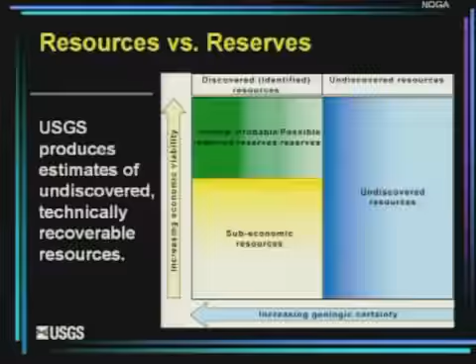As far as resources versus reserves, this is a key point to us, and it's key for us when we talk to people in Congress. The congressional people seem to switch seats very rapidly. All the staff has rapid turnover, so we're constantly going over these terms. Just to let you know that the USGS responsibility is for assessing undiscovered resources, which is this blue box on this thing. We don't do reserves. Reserves are the purview of the Department of Energy. We don't do economics either. We have all we can do with geology. The economics are left for people like the people here at the Baker Institute.

The goal of the national assessment in the U.S.: we look at priority basins. There are approximately 70 geologic provinces in the U.S. About 42 produce oil and gas. We've prioritized about 32 of those, which contain about 96% of the known resources. As geologists, we chase after the petroleum systems, which are the fluids in these basins, and the assessment units are plays, which are the rocks. So we have a bunch of guys who just chase after the fluids and rocks.

And in the end of that, we have to somehow on paper come up with numbers that are somehow backed up by the geology. We assess both conventional and continuous resources. The word continuous is something we put in there to replace the word unconventional. And finally, economics are not included, and that's an important point that's lost as we deal with Congress. They think we do economically recoverable resources, and we don't do that.

One of the interesting things that happened in the year 2000 was for the first time, after 30 years of doing these assessments, there was a law put in place called EPCA, where it actually named us to do these assessments, basically aimed at assessing oil and gas on the federal lands. And again, you can see they use the word reserve in here rather than resources, which is a real problem. But for the first time, there was a law in place that said we had to do this on a regular basis and provide these estimates to the congressional committees. And that's what we're working under presently.

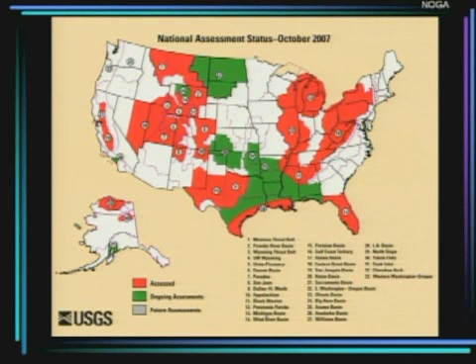For the status where we are now, the red basins, this is not a political statement. This is simply the basins we've assessed so far. The green ones are the basins we will assess in the next few years. That will encompass all the major onshore and state water resources in the United States. Again, we don't have the jurisdiction to do the offshore. These are the basins we'll do in the next few years that will finish this latest round of basins for what we call the 2000 plus assessment.

The methodology, it's important. You simply have to know how we arrive at these numbers. We have conventional gas resources and what we call continuous gas resources. Those are the ones like tight gas sands, basin-centered gas, gas shales, coal bed gas, gas in chalks. So we have these 2 main categories of resources and hence 2 main assessment methodologies to cope with that. And again, we use the word continuous because it's geologic. Unconventional, we started to have problems with the congressional committees in that you use conventional wells to get at this stuff. Why do you call it unconventional? So we went to a more geologic definition.

I'm not going to say much about hydrates. We're about to do the first assessment of hydrates on the North Slope of Alaska. That will be done in about the next 6 months. And again, my job as project chief is to take a bunch of geologists and try and wrestle how much uncertainty they're dealing with in these assessments. It's a big task, especially with geologists who can never agree on anything.

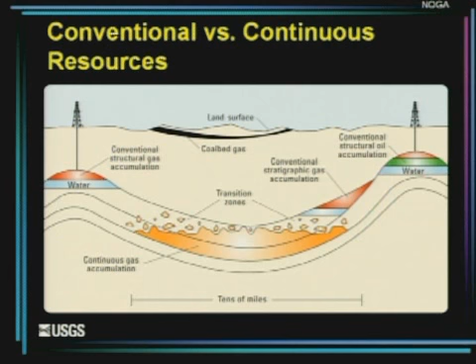But there's this big class of resources that we call continuous that are very diffuse across basins, regionally, and geologically we go to that continuous term. And again, that's basin-centered gas, tight gas, gas shales, coal bed methane. So we use a very different methodology to assess those. So again, very different geology, very different methodology. And you have to know that as you go into the assessment process and know what those numbers truly mean.

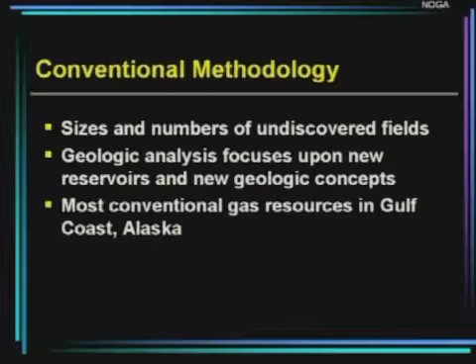For conventional oil and gas fields, we come at this with a size and number methodology. We know the field sizes of existing fields. We use that as guides to what possibly could be found in the future. Most conventional gas resources in the U.S., as we assess it, are mainly focused in the Gulf Coast and Alaska.

For the continuous accumulations, these are coal bed methane, tight gas, gas shales, even hydrates. We use a very geologic definition of the assessment units, and then we go at this with an engineering approach. We look at well production performance, decline curves of wells, drainage areas of wells, and try and come up with a very data-based and data-grounded assessment methodology. So again, one that will produce numbers that are certainly technically recoverable numbers. These are not in place numbers. And again, every quantity here is uncertain. And my job is to define that uncertainty and get the spread of the results as large as I possibly can to cover every base.

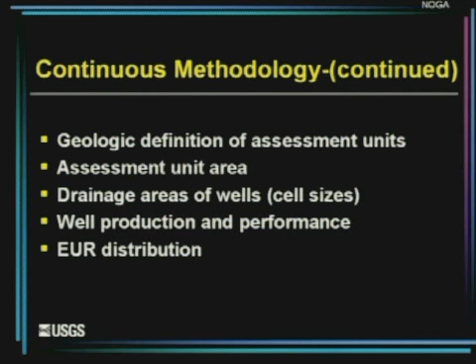Again, what we do is we come at this play area or assessment unit area. They have to define that. That's a problem. We look at drainage areas of wells. We need wells that aren't interfering with each other when they produce. It's a very difficult quantity to come up with. Well production and performance, we look at the estimated ultimate recoveries of wells, come up with distributions of that. So we have a distribution of estimated recovery, a distribution of drainage areas, and error on the definition of the play or assessment unit. Put all that together in an analytical solution to come up with volumes of resources.

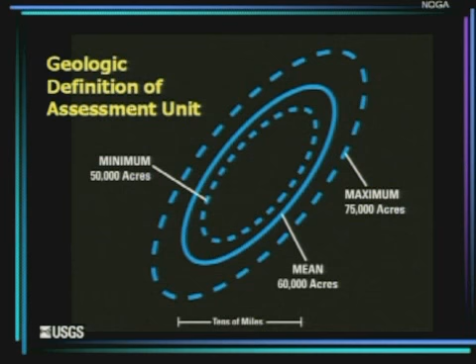I'll very quickly go through this. This looks like Saturn, but it's actually a map view of a play. Again, uncertainty on all these unit definitions. A geologist will love to draw that blue solid line, but in reality there's quite a bit of error on that. The assessment units are based on reservoir performance of wells. There's production sweet spots that you have to separate out. And outside of those, the EURs, the wells usually do worse. A good example of that is the Barnett Shale here in Texas. And the Barnett Shale is the Newark East Field, which is a real sweet spot in that continuous regional accumulation. All the wells do far better there than they do outside of that, so we assessed the Newark East separately from the bigger Barnett Shale play.

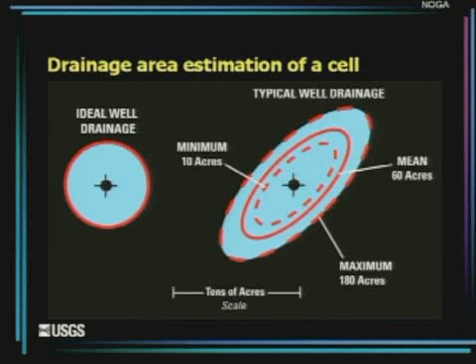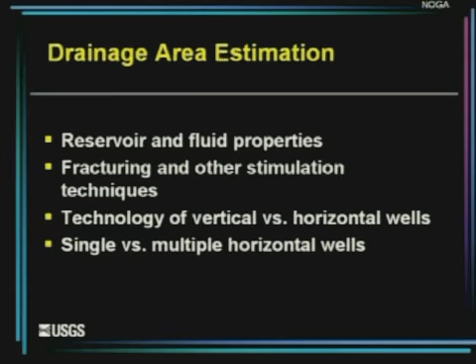Drainage areas of wells, another problem area. There's an ideal well drainage where the rock is allowing the fluids to move into the well bore, but a typical well drainage is dependent upon that geology, and it can range, we do this in acres, from 10 to hundreds of acres. We look for means, we look for distributions on all these quantities. It's a very difficult thing to quantify, particularly since stimulation techniques vary so widely. You have vertical versus horizontal wells, and all various types of horizontal wells, whether they're single or multiples. All this gets factored into our EUR distributions and determination of acreages of drainage areas.

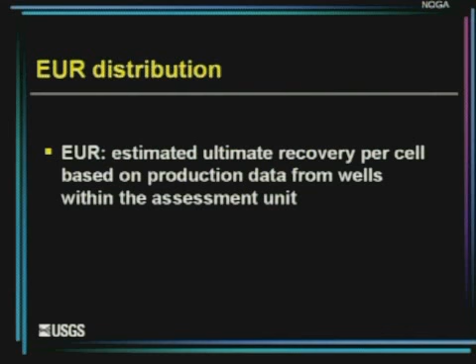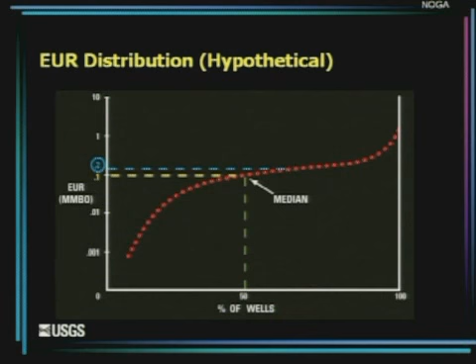The EURs are based on existing data. Again, very data intensive, and that's applied play to play so that we actually have a grounding in data on these assessments. I'm not going to go through the EUR distributions, but suffice to say that this isn't a Karnak approach to do the assessment. It's actually based on wells within the assessment units. I'm not going to go through that calculation.

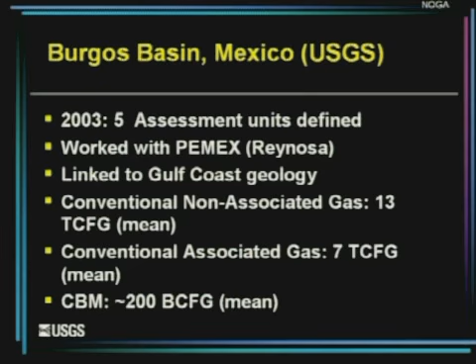That's the U.S. I just want to say a few minutes worth of what we've done in the biggest gas basin in Mexico. In 2003, I worked with Pemex to look at the geology of the Burgos Basin. We defined 5 assessment units or plays in the Burgos. Of course, it's linked to the Gulf Coast. The geology just crosses right across the border. We assessed the mean conventional accumulation there, about 13 TCF at the mean. Conventional associated gas, about 7 TCF, and that's the gas offshore associated with the oil.

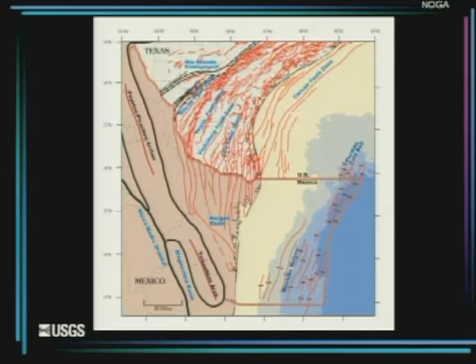And surprisingly enough, we put quite a bit of oil offshore with its associated 7 TCF of gas. But the 13 TCF onshore turns out to be approximately the same as the Pemex assessment. So we felt pretty good about that. I probably shouldn't say anything about where the gas is going to end up, but I don't think that's part of the gas that will end up in any sort of U.S. mix.

Interesting, when I was doing this study with Pemex, I would stay in, what's the town, McAllen, Texas? And walk across the bridge to Reynosa every day. But the Americans made me walk through a turnstile and put a quarter in every day. It was very strange.

Just to sum this up, I hope I've impressed upon you that we have these 2 main categories of assessments for gas and oil both: conventional and continuous. Both very different methodologies, both grounded in data, however. Our focus has been on continuous gas in the U.S., and it will continue to be over the next few decades. Conventional gas, once you leave Alaska and the Gulf Coast, is really flattening out. The trick with the continuous gas, as I mentioned, is the colossal number of wells required to produce this gas.

And that's where you run into problems of who owns the land, what kind of animals and plants are on the land, what time of the year it is, and which species are around. It's a real problem when you're talking about needing hundreds of thousands of wells. And it also gets into the issue of how much time is required to produce gas from wells where you need to probably drill 50,000 of them. Anyway, that's the whole issue with continuous gas.

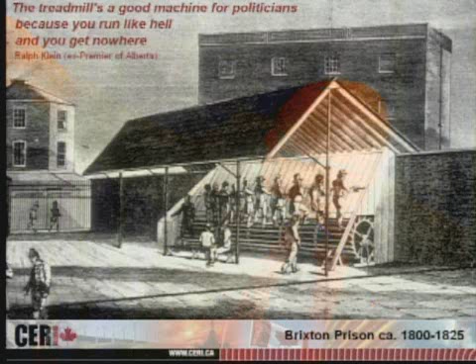Our previous premier of Alberta was Ralph Klein, and he was the one that said up in the top corner there, the treadmill's a good machine for politicians because you run like hell and you get nowhere. And this is one of the original treadmills from Brixton Prison, which is not far from where I grew up.

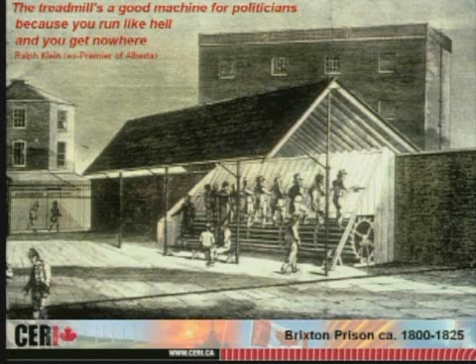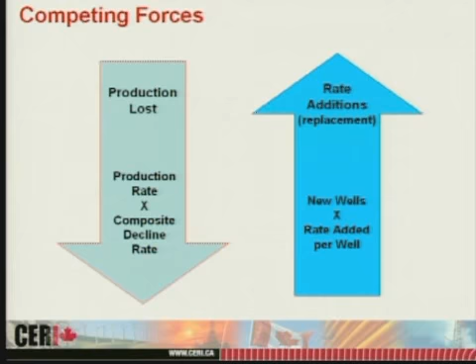But it's basically two competing forces. You're producing the wells, you're losing production because the wells are producing and there's a decline rate, and then you're trying to replace it with the rate additions, the new wells and the rate per well. And I'm going to describe this same diagram. I'll show it 2 or 3 times here in the next little while with some different notes on it.

It's critical to understand that in the early 90s we were tracking along where the number of wells we were drilling and the growth rate in production was essentially matching. And in the mid-90s, it got to the point where we could still continue to grow the production in Western Canada, in the basin. It's a very well-endowed basin, probably the size of the whole Rocky Mountain province in the U.S., so the production in red continues to grow.

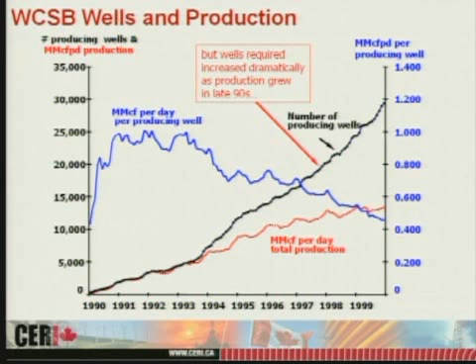But what we see is the wells required to maintain that production rate increased dramatically. And the last speaker talked about the number of wells that were going to have to be done for the continuous drilling, for the continuous resources. These were at this stage still conventional resources, but lower productivity. And that's the third element in here.

The blue line, you can see that the million a day on the right-hand side per new well added has reduced over time to less than 500,000 a day. And in fact, as that's gone into the future, the wells have continued to skyrocket in terms of the number of wells required in the basin just to stay flat with production, and the production per well has decreased. So that's the critical problem in a mature basin like Alberta, like the Western Canadian Sedimentary Basin.

So if you aggregate all that and look at what's added each year in black, or rather, if you go from the top of any one column, the red on say 1995, and go down to the top of the pink on the ensuing column, that's the amount of production lost, shown in the black on top of the pink in the next year. And only if that's exceeded do you get another increase. And you can see that throughout the 90s, we were able to continue to increase production in the basin. Since then, however, we've been struggling just to maintain production and replace the resources.

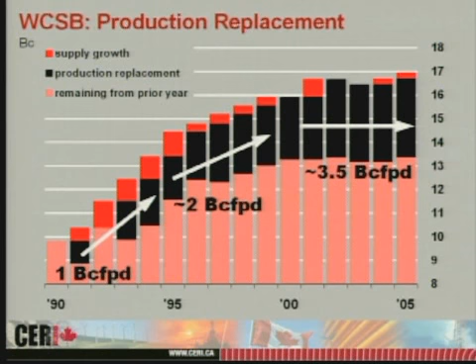The other thing is that the wells that were in existence prior to 1990 have been declining all this time, and much like what John called his thousands of crappy wells, they continue to produce. It's just that they're tailing out here. The asymptote is coming down, and they will continue to produce for some great length of time. But most of the production now comes from wells that were drilled since then.

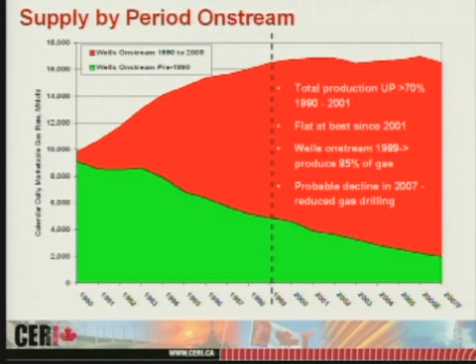In fact, probably 50 or 60% of the current production comes from wells drilled in the last 3 years. And that's quite similar in basins around the US as well. So it's recent additions that are replacing that production, and then they start to decline quite rapidly before they tail out as well. And you can see it in terms of the productivity classes.

That's illustrated from a map point of view. This is a period of time. I borrowed this from another consultant in Calgary who worked with us at the time, Forward Energy, Dave Flint. This shows all the townships that had wells in them that produced at a given level, and the levels are shown on the right there. And the blue ones at the very bottom, less than 500,000 a day, are shown as low deliverability. Only 37% of the rate additions is coming from those thousands and thousands of wells.

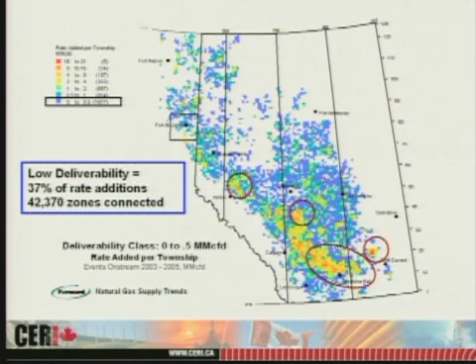The other 60+% has to come from the higher productivity ones. And over this period of time, which was 3 years, 2003 to 2005, some 42,000 completions were put on stream from these shallow wells.

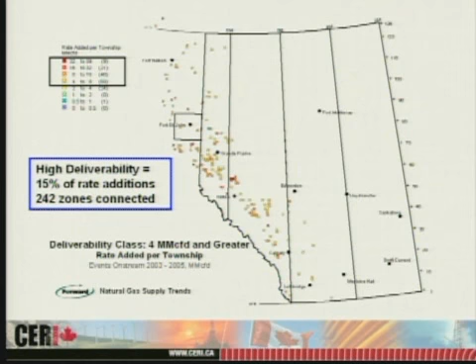If you look at the other end, the pieces that were shown there in the circles, very, very few at the other end of the scale. Very few in the greater than 4 million a day. In fact, 240-something zones connected. So the very high-rate ones do add reserves, but there's not very many of them, and you have to rely on a tremendous amount of drilling in order to keep this productivity of the basin up. Just gives you some idea of this magnitude.

Now, for unconventional here, you could almost read continuous, but it also includes the very shallow drilling on the unconventional side. You can see that unconventional activity, as it's often designated, is already 33% of the production out of the Western Canada Sedimentary Basin. I think in the US it's already over 40%, the non-conventional production.

So we're following along. You can see how thin our little shale piece is and how small our CBM areas are. They haven't grown to the extent yet that they have in the US. And to be perfectly honest, the tax breaks in the 90s that developed the technology for coal bed methane, for example, were applied to the simpler and easier basins, and now with technology improvements, we've taken advantage of that R&D and applied it in Western Canada, and we're beginning to put a fairly significant coal bed methane and shale gas piece together as well.

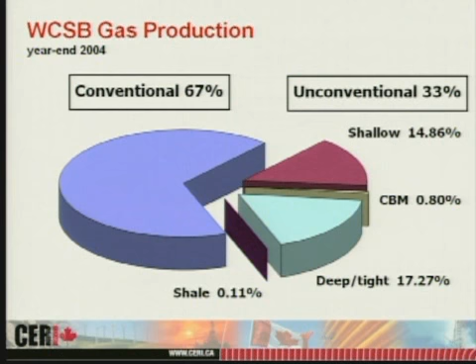What I want to do at this stage, though, is talk about some differences in the basin. This basin is north of 49 degrees and up past 60 degrees in terms of latitude. Certainly when I had to scrape the ice off my car early yesterday morning to drive to the airport, and I didn't have to do that this morning at the hotel, there are some significant differences by being at different latitudes. I want to talk about rig utilization and the rig cycle on an annual basis.

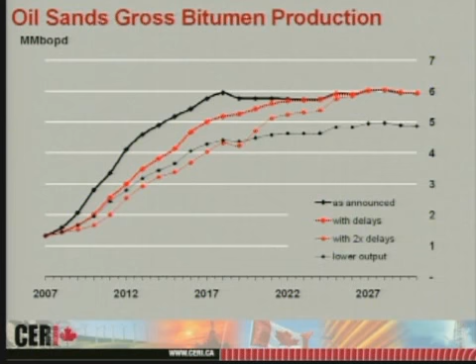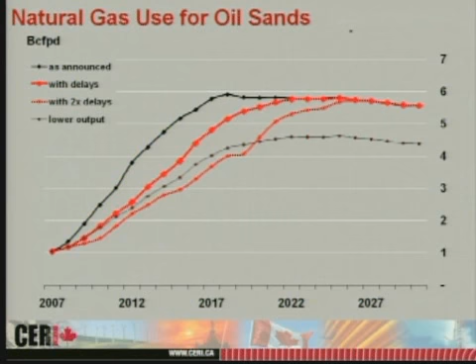Now, if you take again the heavy red line, that is the natural gas use for that, and it gets up to over 5 BCF a day if all the projects that go ahead are all using natural gas. Now that's not a given, but a lot of them are already using natural gas. And if that were the case, this is what you would see for natural gas usage. Mining and extraction isn't a big deal. You don't use a lot of gas for that.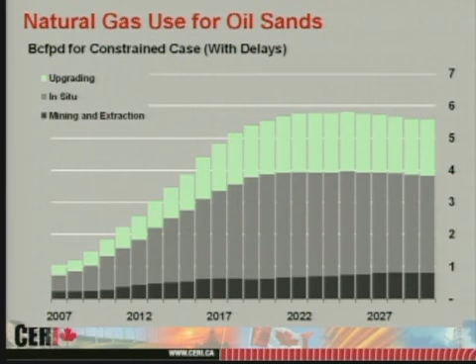But the in situ operations, when you've got to have high pressure steam in the ground to move this bitumen, to heat it up and move it, huge. And also the upgrading piece where you're going to crack that bitumen into a synthetic crude oil. And 85% of the crude is expected to be turned into synthetic crude oil.

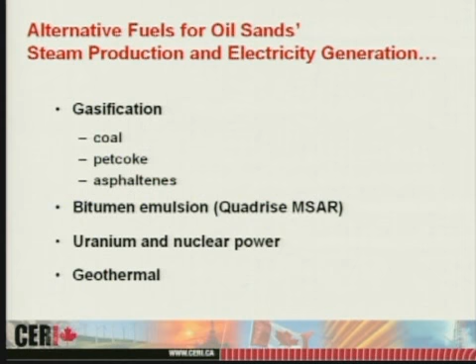The last piece is around what the alternatives are in using that gas, and we mentioned them earlier. The whole idea of coal, particularly pet coke and asphaltenes being used, and then the whole idea of using the bitumen itself in an emulsion to create the steam and electricity. I'm going to have to stop in terms of these other pieces that are likely to reduce that very large gas use in the oil sands, because it will be a considerable reduction, but these are the pieces that are going to do that. I apologize for taking a little more than my allotted time. Thank you.

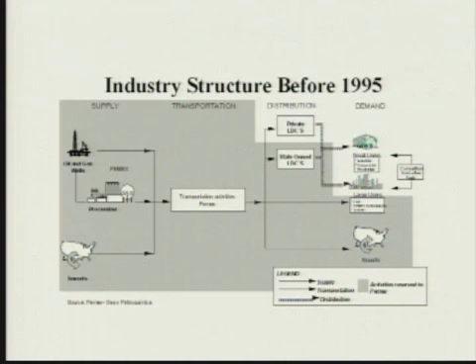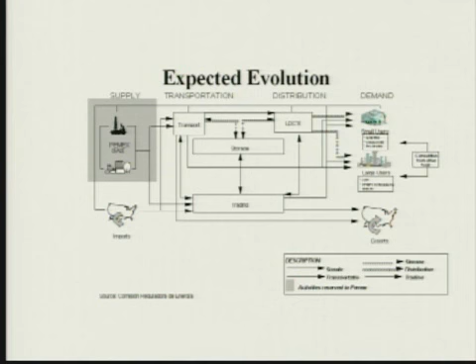And all this took place through a regulatory reform process that implied both decisions on the organization of the industry and also on specific incentive regulation for several variables such as prices and auctions. So this is how the industry looked before 1995, with Pemex as a vertically integrated monopoly. And the idea was to evolve in the long run to this type of industrial organization where we see more competition in other areas. And the idea was that the monopoly of Pemex would be just restricted to production.

Along with this long-run vision of the industry, some specific policy decisions were made, such as the granting of exclusivity in distribution and no exclusivity in transportation, also liberalization of international trade and the elimination of import tariffs, the allowance of some vertical integration given that new competitors would be dealing with an already existing powerful incumbent, which is, of course, Pemex.

Also, the liberalization of marketing activities so that no permit was needed to operate marketing, the regular open access clauses to transportation and storage, as well as for distribution, where commercial bypass was implemented from the first day of operations, and likewise the design of incentive price regulation in distribution, transportation, and in production, where we use an international yardstick regulation, which is based on the price in Southeast Texas, in fact, in the Houston Ship Channel.

So let me give you some details on how the regulatory reform process was designed for distribution, transportation, and production. I will start with distribution. I need to tell you that I will be dealing with technical aspects. Sometimes I will have to present some equations and models. I apologize for that. I will try just to go briefly through them and try to give you the main idea of the models and the methods that we use in Mexico.

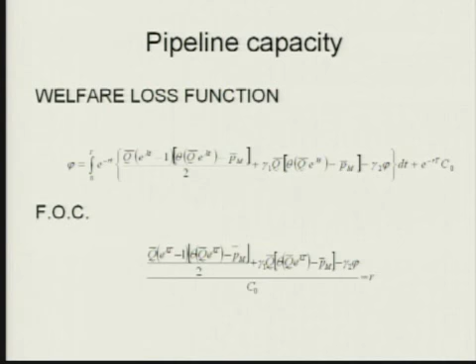So the objective of a regulator would be to minimize this welfare loss function, and the choice variable would be the optimal time of investment. And this is an explanation of how this works. For example, this is an example for a 48-inch pipeline, 300 miles long, with a 30% rate of return.

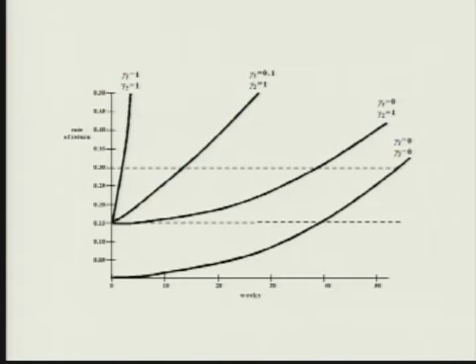Consumers would be willing to pay for the expansion of capacity if we give equal weight to everything in the welfare loss function. They will be willing to pay for the expansion of capacity in approximately 2 weeks. So this type of analysis is telling us that the fundamentals of the decisions on having consumers paying for the expansion of capacity is adequate, at least from an analytical point of view.

The other approach is what we have right now, which is trying to use a cap on two-part tariffs and using the rebalancing between both parts of the tariff to provide incentives to invest in the system.

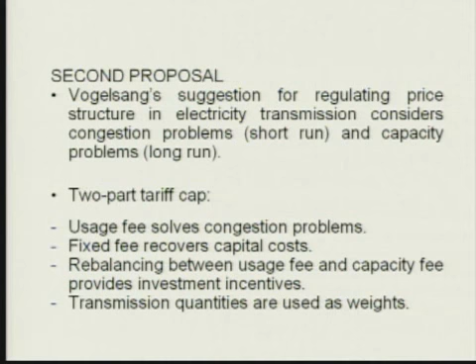So I have to move on. I have only 5 minutes more. So let me finish up a little bit with production and how the incentive regulation was designed, and we will see what are its effects.

So in production, price regulations seek to provide incentives for productive efficiency by making Pemex another competitor in the North American natural gas market. And this was basically achieved by using the proposal made by Little-Mirrlees back in the 60s, which in terms of the pricing of domestic natural gas in Mexico is equivalent to setting the price in Mexico in terms of its opportunity cost of using it in Mexico rather than exporting it to the US.

So the idea basically is to take the price in Southeast Texas and then add net transport cost to the place where most gas is produced in Mexico. So you take the price here in Houston and then add up the net transport costs all the way back here to Ciudad Pemex. And that is setting the price in Mexico.

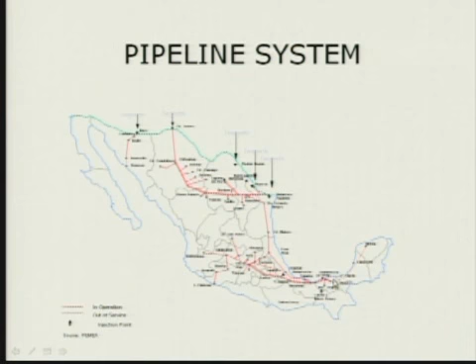What are the effects of this formula? Well, first of all, in an Energy Journal paper, we showed that this type of formula coincides with the objectives of a regulator that maximizes welfare subject to resource constraints in the pipeline network.

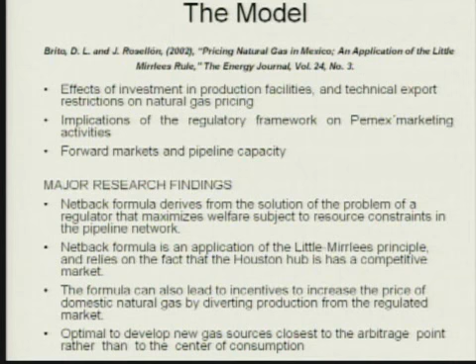However, this regulation also presents a problem in its structure of incentives because Pemex has incentives to decrease investment in gas production and processing, even to flare gas, and to deviate production from the regulated market to its own internal market, so as to bring the arbitrage point and get more than proportional rents due to that decrease in the location of the arbitrage point.

Likewise, Pemex has incentives to congest transportation pipelines to increase domestic natural gas price, as well as to strategically use the pipeline capacity to preserve its monopoly in gas marketing and evade the netback price regulation.

So the proposals that we did and that were implemented by the regulator were firstly, a close regulatory monitoring of Pemex production, processing, and gathering activities, and also of its flaring activities. Likewise, fixing the arbitrage point, but this was a short-run proposal, but the idea was to fix the arbitrage point at a level that forces Pemex to increase production and investment, and also having Pemex being charged for the gas it uses and the gas it flares, and likewise enforce the open access to gas pipelines and investment in the network.

Of course, again, another big problem is Pemex vertical integration. We proposed an equivalent measure, which was not letting Pemex market gas inside of Mexico, but that was not feasible in terms of public policy due to political reasons.